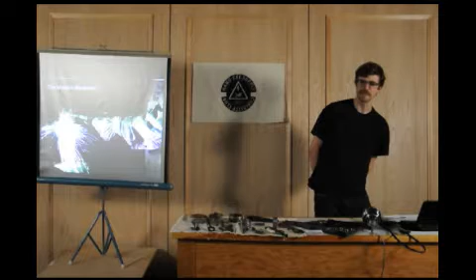So what I want to do is get everybody up to speed real quick about what it means to forge, what it means to be a blacksmith, in a historical sense and in a practical sense too. So we'll all learn a little bit about blacksmithing, and then look at some examples of work from some really talented blacksmiths from the past, and also some local blacksmiths, and then we can look at some of the work that I'm doing and talk about that a little bit.

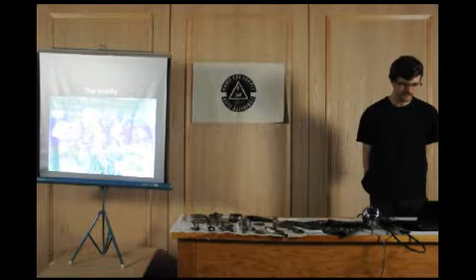So typically things haven't changed that much in the layout of the blacksmith shop, but things did eventually change, as you'll see. So what are the people doing?

Like, they're hammering metal. What is it that a blacksmith's actually doing? Are they just smashing it and seeing what happens, or is there more control to it? When you watch blacksmithing, it looks really loud and dirty, and you might not see exactly what's happening, but it does take a lot of finesse and control.

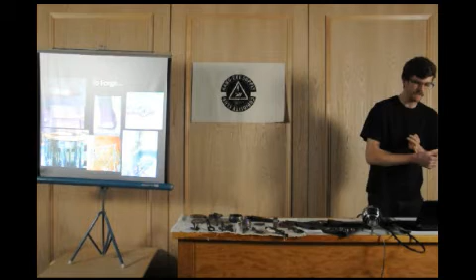And so these are a few examples of pretty much the basic ways that a person can work metal, and when you put it all together, you can have a finished product, like a fire screen or a railing or a tool. So in the top right corner, it's just a taper. That's pretty much the simplest thing.

If you take a blacksmithing class, you'll learn how to take a bar of metal and taper it to a point, and it is the starting point to lots of different processes. Say if you're making a knife, you might start by making a point like that. If you're making a leaf, you might start by doing that. So it's a handy thing. You can leave it as it is, like if you want to point a fence post, or if you want to turn it into a leaf later, you can flatten it down into a leaf.

The next one in the middle is just an upset. It's called upsetting. It's when you actually widen the end of a bar by heating only the end of it and hammering it onto itself. So instead of elongating it, you're actually thickening it and smashing it back on itself.

The next one that you see right here is a hot punch. Typically a traditional blacksmith will try to do as much work on the anvil as possible. Say for example that's a part of a leaf that I was making. I don't get it to that step, then throw it in water so it's cold, go over to the drill press and drill a hole in it. I keep the steel hot: you put it in the forge, take it out, and do the next operation.

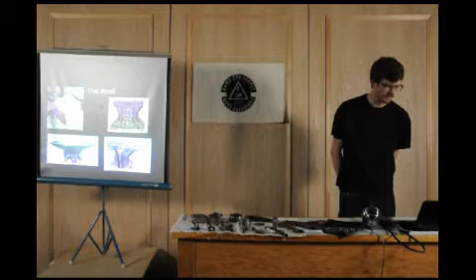So the anvil. The anvil has been around for a long time. The picture in the top right is a piece of stone that was used as an anvil a long time ago. And then there's a few examples, I just thought it's kind of fun to see the different manifestations of the anvil. It serves the same purpose in each of these, but they each come from a different time. One thing they all have in common is that they're big and heavy.

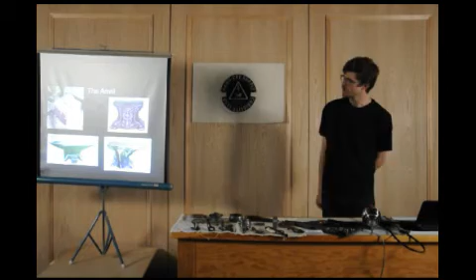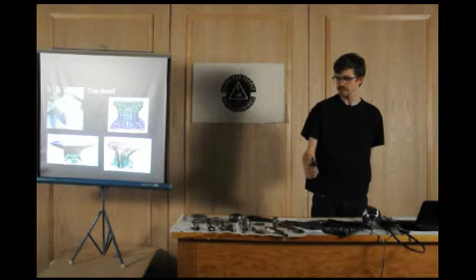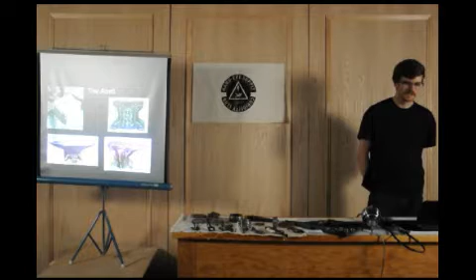They have a nice flat top, and most of them have a hole in the top, which is called a hardy hole. You can see it right here, here, and right there. That part of the anvil can be really useful because you can stick other tools into it. Here's an example of a little hardy tool that you would put in your anvil for a specific use. What surprised me is that even this really old stone anvil, maybe 1,000 years old, had a hole in it that they would use however they could. So yeah, it's called the hardy hole.

Next is some contemporary anvils. The upper one has a lot more functional spots on it than the old stone anvil. The bottom one has a different design, but very useful. It does the same thing, it's just a new one. This anvil is actually made in Port Townsend, Washington, which is kind of cool, so you can buy them if you want. Which one is that? These ones, Nimba is the brand, and they're made in Port Townsend, Washington.

What is the purpose of the triangular sides of it? That's a good question. So you have two sides, the round side and the more tapered flat side. The round side can be used for bending. If you stick a hot piece of metal over the end of it and hammer it off center, it'll follow the curve, so you can use it for making a scroll or other things too.

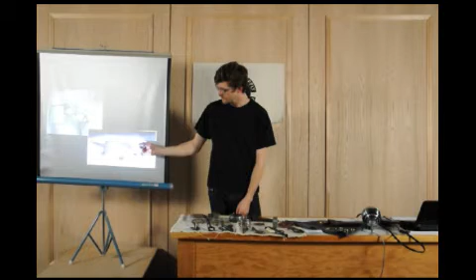And then you might use this end if you have a part that is a weird shape and you need it to fit under the end of the anvil. Say you're hammering a big U shape and you can't really rest it on the anvil flat, but if you stick it over the end, you can still work it. So that's a good question. There's other more specialized anvils for particular uses like horseshoes or chain making too. So yeah.

Okay, so the hammer, the other part of the equation. I just wanted to illustrate here that these are all examples of hammers found all over the world from different traditions and cultures, but they pretty much all do the same thing. Everybody kind of has a preference. If you meet a blacksmith, they might have a hammer that looks like one of these, and they would say, "Oh, don't bother with another hammer."

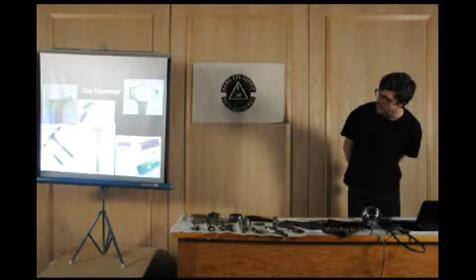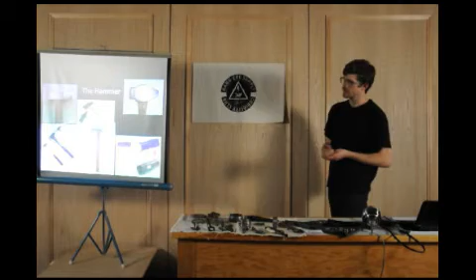And the thing that I find fascinating is that some of these hammers were developed in different countries right next to each other, and became the typical French hammer, the typical German hammer, or the Swedish hammer. I don't really know why, but they're just known that way. So this hammer is a French hammer, and if you go to France, a blacksmith might use a hammer like that. Maybe they won't. But if you ever read a French cartoon like Tintin, the hammers in the cartoon will probably look like a French hammer, which is kind of funny.

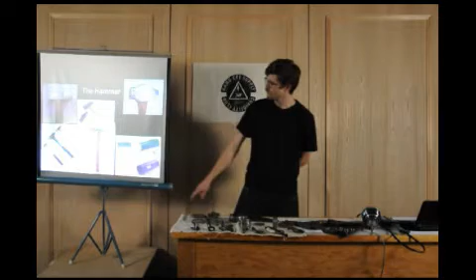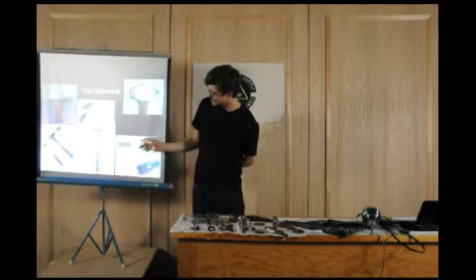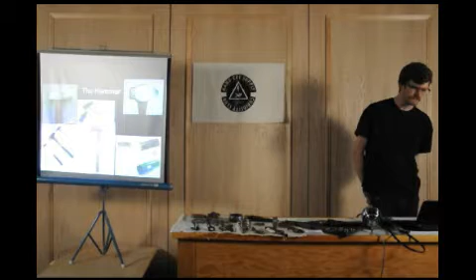Then we have more of a German-style hammer, a Swedish-style hammer, and this is a more modern design. And the most unique of them all is a Japanese hammer. This would probably be used for knife making or tool making. The first time I saw one, it looked awkward because it looks a little imbalanced and it doesn't look easy to swing. But apparently that style of hammer makes it really useful for drawing the taper of a knife blade and other things. And this is an example of a handmade hammer by a guy in California. It's just really pretty.

So the Japanese are an example of the cultural differences in blacksmithing. There's a lot of metalwork in Europe, there's a lot of metalwork in Japan, and they developed on their own separately. That's maybe one reason why the tools look so different from a German blacksmith shop to a Japanese one.

I noticed all the hammers had a point on the back, or a flat point. What's that for? It's a good question. They all have a flat side and a more tapered side. The peen side, or the tapered side, is essentially used to control the direction the metal is moving. If you strike some metal and want it to move equally in all directions, you would use a ball peen hammer, because it's essentially a sphere on the end. When the hammer strikes, the metal spreads out away from that, like it was a piece of clay.

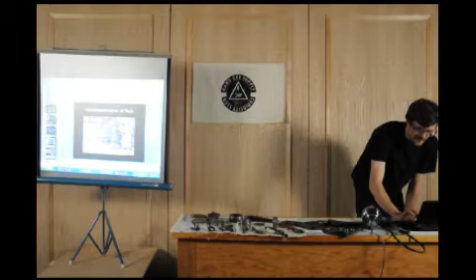And as you can see, this video was filmed probably in the last few years. So there's some blacksmith shops that still have these types of hammers, and will occasionally fire them up, probably for demonstration. But I don't think many people actually use these for production, because the more industrial hammers are a lot more powerful, but I thought that was a cool thing. So let's go back. I don't have a video of a regular power hammer working, but that earlier hammer is a lot more interesting.

I'll show one more video real quick. But the hydraulic press has become a useful tool for small blacksmith shops too, because a power hammer can be a really loud tool to have, especially if you're not in an industrial area. I don't know, this isn't working. Anyway, that's okay. You can use a hydraulic press to move metal without the ringing of the hammer. Lots of knife makers use hydraulic presses nowadays, and lots of contemporary blacksmiths use it and get some interesting results from it.

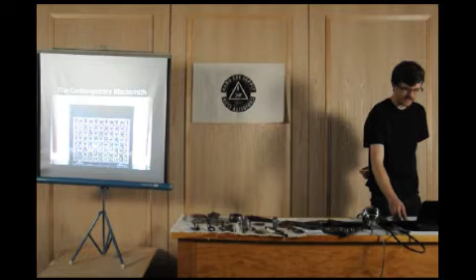Anyway, so this is an example of some work that's using some more modern technology. This is a fire screen that a shop in the Midwest called Red Star Forge built. So what's different about this is it's a kind of a cool design. And instead of forging each of these modular elements, they had their design cut out with either a laser or a water jet cutter, and then they did a couple operations on it to give it some more 3D, to twist some parts, and then put them all together.

So this is something that you could forge to shape, meaning heat up a bar, hammer it to shape, and get them all exactly alike. But they chose to use a more modern tool where you can essentially design a part on a computer, send it to a shop, and they'll cut it out precisely as you like. And then they did some more operations on it to turn it into this fire screen. Not that many blacksmiths will do things like this, but I thought that it was a good, successful use of something like a laser cutter or a water jet cutter in a forged fire screen.

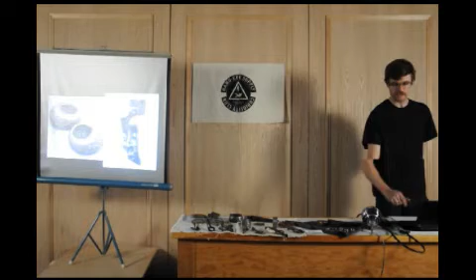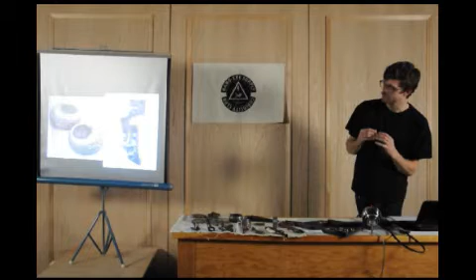So this is a couple examples of using non-traditional tools. The candle holders were made using a hydraulic press. So you would essentially take a piece of round material, like a small couple inch long piece, and if you just squish it in the middle and put an indentation in it, the outsides of the steel start to collapse, and you get some really interesting results. And that form of the candle holder isn't something that you would get by hammering. You couldn't really get the same sort of result. So if you're using a hydraulic press in your shop, you can incorporate design elements like that into your work pretty easily.

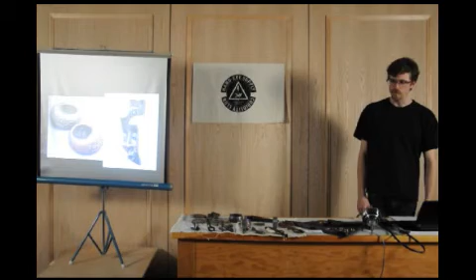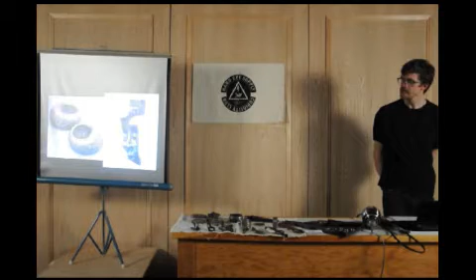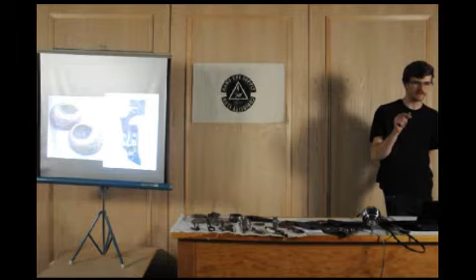This is another example. This is actually a face. If you were really talented, you could forge features like that with somebody's help. But what's unique about this piece is that it was forged using pneumatic hand tools, which would essentially be like a small jackhammer with a rounded hammer bit instead of a pointed bit or a chisel in it, and you actually shape the hot metal with essentially a jackhammer. And that I just learned of yesterday, so I didn't know anybody was doing that.

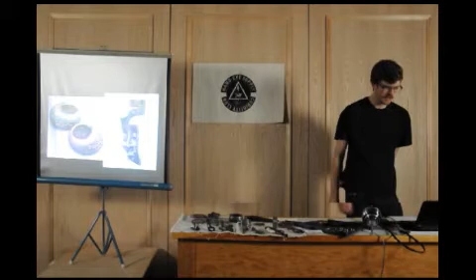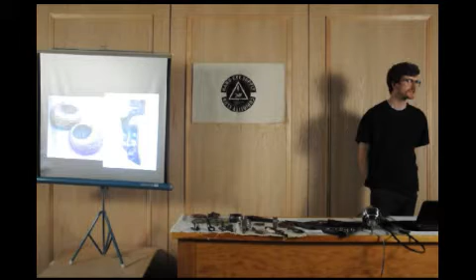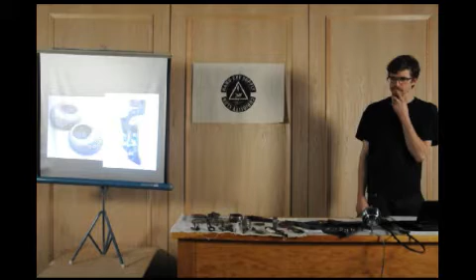So what's kind of cool about these last few projects is that they aren't traditional, and I think that it's exciting to see people inventing new ways of using tools to work metal, especially in a trade like blacksmithing, where it has typically been such a traditional type of thing where one person passes the knowledge along to the next and so on. So these are some fun examples of techniques that you probably wouldn't learn in an old fashioned blacksmith shop.

And the thing with tool steels, like the steels that you would use to make a chisel or a knife or a drill bit, there's lots of different kinds of them. So you can weld together all these different tool steels, and when you're done, it might be one solid piece, but it actually still retains the different properties of each layer of steel in it.

So it can be revealed once you grind and polish the blade. So is it like welded together in a larger format and kind of stretched out? Yeah. Like you would do glass? Yeah, if you're familiar with making a cane of glass, which would be like, if you looked at it on the end, you could have like a flower pattern or something.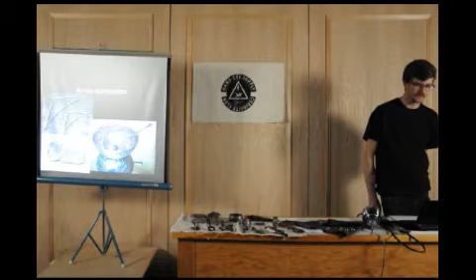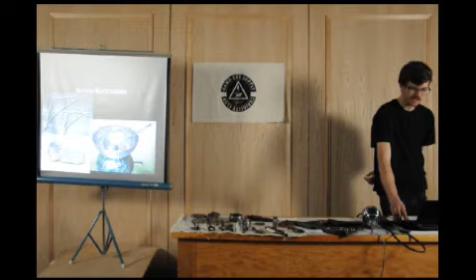I wanted to show Arnon's work. He's a local blacksmith and a nice guy. He actually teaches forging classes at his shop, so you could look him up and give him a call and see if he's doing that. He works with stainless steel a lot, which is not so traditional to forge, and is a really difficult metal to work with. And so his work is really stunning, I think. And these are some tools and knives that he's made.

And there's a handful of blacksmiths in Portland too. So it's good to know that they're out there. And there's some incredible ones in the Northwest in particular. And then this is an example of an old-fashioned blacksmith. This guy is an Austrian who moved to Milwaukee, and he lived there in the late 1800s to the middle of the 20th century. And this is a piece of his. It's essentially a window grill, and it's all forged to shape. And I think it took years and years to make.

But this is something that lots of blacksmiths will look back on and have no idea how it was made. So in some ways, the masterpieces of metalwork that you might see if you go to Europe, you'll wonder how was it ever possible to do this, and why? And it's true, maybe we won't be able to do it today because those types of skills haven't been passed on.

Which is, you know, maybe it's okay. What's encouraging though is that there are some working blacksmiths today that are doing incredible work and pushing the boundary, and some people are just incredible artists. So this is a good example of one of them. Cool. All right, here we go.

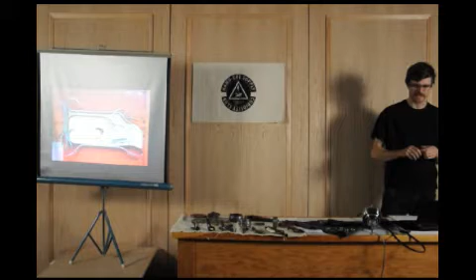And when I was working and starting it and drawing it on the table, which is a nice way to start, where you can draw directly on a steel table and then build your pieces to your drawing, I started just drawing with lines and came up with this design somehow, and it was really a pleasure to build it because it kind of happened really naturally.

And so I kind of kept the form of the tree, but really stylized it and broke it down into lines and just different elements that I joined with rivets. So yeah. And there's no side to the mirror, or the mirror frame has one side open, and I liked that too because I didn't want to make just a square or rectangular mirror frame, honestly.

So. Are the rivets a different metal? Are they steel? In this one, they're copper. You could make them out of steel too. Copper rivets are kind of nice to use because you don't necessarily have to heat the rivet to set it. Whereas if it's steel, you would have to have your two pieces with your hole, put a hot rivet through it, and then put it on the anvil and hammer it. But with a copper rivet, you can actually do it cold, which is convenient. And if you need to hammer it more, then you can heat it up with a torch and continue on.

Rivets are great. I use rivets in almost all of my work, and it really kind of encourages you to think out the whole fabrication process before you even join a rivet. For example, in some cases, if you set one rivet, it'll prevent you from setting another one. So on this one, I'd have to look at it for a minute to find out which order I did it in. But it's something that you do have to figure out before you start setting your rivets. You can have all your holes drilled and ready to go, but I'll show you an example.

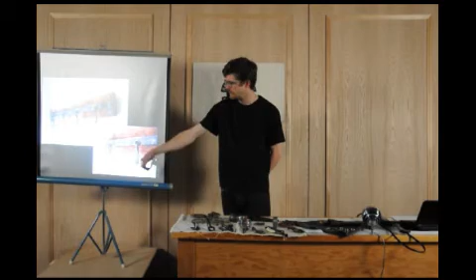Okay. So this is actually something I made recently. This is a really simple coat rack design, and it's fun to make. It's all done on the anvil as well. And the unique part, at least in my mind, about this is that these hooks kind of dangle, and they're not mounted hard to the board, except for on the two ends where this main bar attaches.

And so you just use a piece of 3/8 by 1.5 inch steel, punch the holes in it, enlarge them, and kind of flare them out. And then when I make each hook, you essentially make them and then fit them around and hammer them so that they won't come off unless you heated it up and bent it again. And this is kind of fun. It reminds me of really old-fashioned mining town type of blacksmithing in some ways.

And that piece of wood is kind of cool too. It's from the Rebuilding Center, and I just planed it and oiled it, and so the wood adds a different element to the finished piece.

Okay. So now I'll just show you step by step how I make this bottle opener. This is like a leaf, and the reason why I want to show you this is because it's made entirely on the anvil. In about a half an hour, you can start with just a piece of 3/4 inch round stock, like a solid piece of steel, and you can actually go through step by step and make a bottle opener.

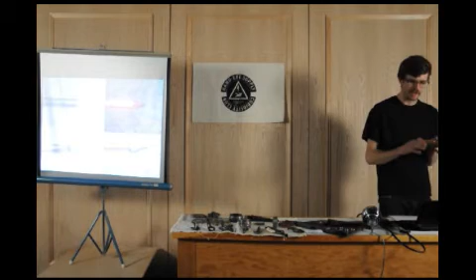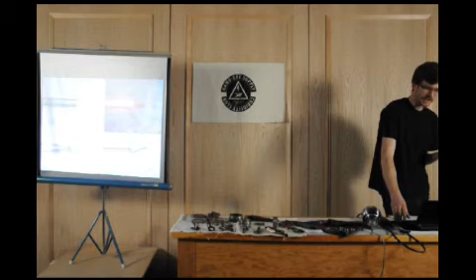And so if I was just going to make this leaf for a railing, I would get it here. Then I would use a ball peen hammer and probably just widen that leaf out and spread it out until it had a really nice shape. You can correct it a little bit, but it's nice if you just hammer the steel, let it spread out, and it usually gets a nice form that way. But in this case, I punch it because it's going to make for where it fits for the bottle opener.

And instead of hammering the steel to get the leaf shape, I kind of stretch it out into this, and then it gets the form that I want. So you can see, you take it a little ways, heat it back up, and drift it a little bigger each time. Then once it gets here, it's pretty much almost done. Then I'll stamp it with a little tool I made to stamp the little pry bar part, which you can see right here.

Then after that, I just do the little finishing touches on it and clean it up, and then cut it off the bar. And you can actually cut it off the bar using this. If you don't want to saw cut it or use a grinder, you can set that in the hardy hole and use it as a cutoff tool. And then you have your bottle opener. I have a few bottle openers up here, and what I do by hand is I file and fit this little pry bar part so that it fits really good. And that's the one thing I do that isn't on the anvil.

So I have a few designs, like this is one of my earlier bottle openers, and it's forged. Then this one's a mix, this one's cut and then forged and riveted. And then this one I like because it's easy to make. You can make this anywhere.

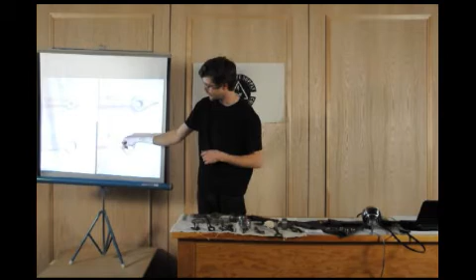So I don't do any hammering around the edge of here or here, and I try not to hammer this because I like to leave it kind of like a square taper. So say right here, I might clean that up because it's a little square right there, so maybe I would hammer that. But does that answer your question? I think so. Okay. There's not like a template for this type of thing.

With the modular pieces, are you creating a template on a drawing or something that you're shaping it to? Yeah, that's a good question. So I'll usually do a scale drawing on the ground or on the table of the scroll that I want, and then I'll try to make one, and then I'll usually make the next ones to that.

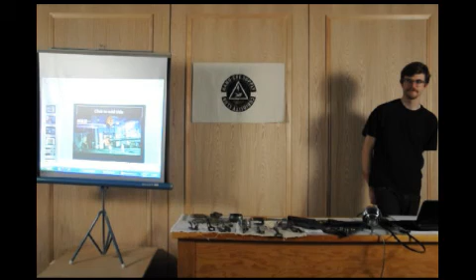But wrought iron, if it corrodes a lot, you'll actually see the fibers in the steel. Where would you see it? Maybe a really old chain link at a shipyard or something might be wrought iron. And if it's all corroded from the ocean, you might see the actual grain of the steel. When did wrought iron really fall out of favor? I don't know, honestly. Good question though.

Cool. Well, I have some examples of things I've made up here. My work nowadays is a mix of blacksmithing and jewelry making, and you can see the intersection in some of my pieces. So come and have a look if you want. All right. Let's have another hand.